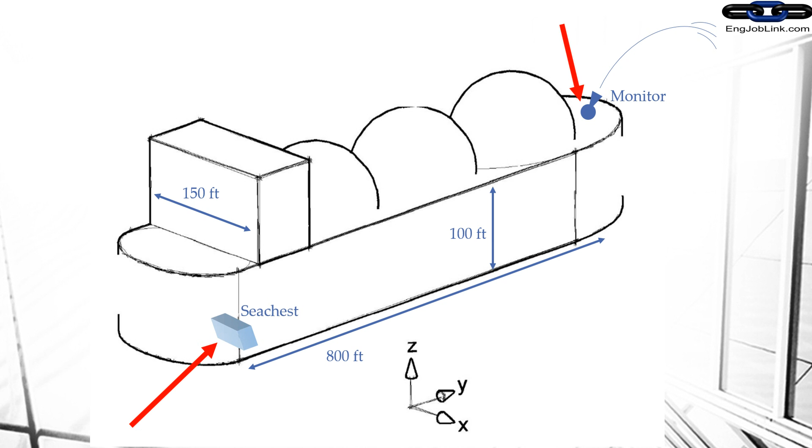Here's an isometric view of our tanker for our system setup. Monitor up front, sea chest in back, 800 feet in between. Alright, let's go to the setup or the basic strategy.

We're going to use carbon steel pipe, schedule 80 wall thickness. Our suction pipe will be assumed 50 feet long with 10 elbows, 2 butterfly valves, pump elevation of 5 feet above the baseline, that's ABL. Water line at 10 feet ABL.

The distribution pipe after the pump to the monitor will be 1,000 feet assumed. 40 standard elbows, 2 butterfly valves, 1 globe valve, 1 check valve, and the monitor elevation is going to be 5 foot above deck, so that places it 105 feet ABL.

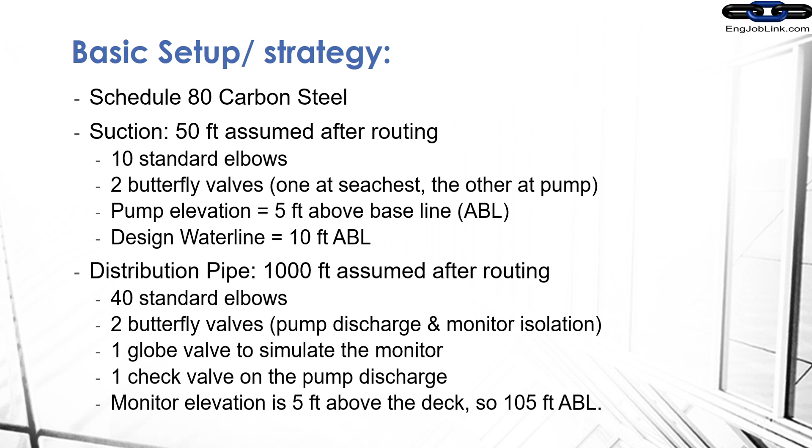Okay, I'm going to set up the system in PIPE-FLO. I already have PIPE-FLO up. One of the first things you do when you open PIPE-FLO to start a new system is you go up and hit System, and you want to set up fluid zone, which is the fluid that you're going to be pumping through a piping system.

Then you will set up specifications, which deal with the type of pipe that you're going to be using, the pipe material and pipe thickness, and then you also set up the units up here. And we are going to use the English units in our example. They're already set up; my PIPE-FLO is English to start with.

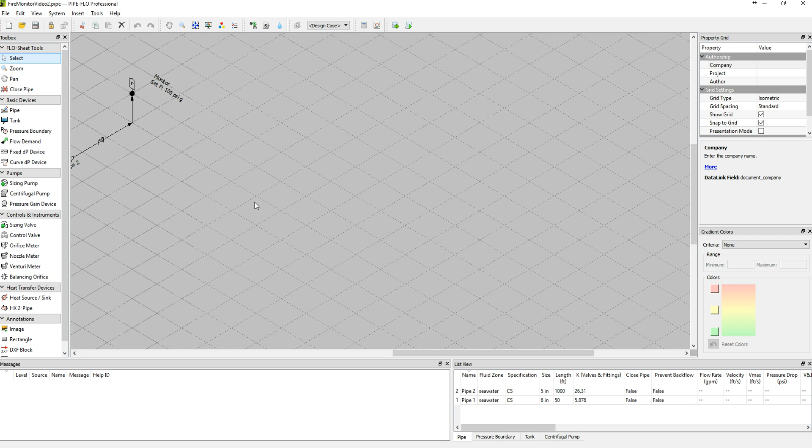So I've already set up these 3 things, and I'm not going to go through that in this video. I already set up the system just like we had spoke about in our setup and strategy. And this is what it looks like: back here is where our sea chest is, and we're going all the way up forward to our monitor.

So our sea chest up and then to a pump in the machinery space, and you're going kind of outboard with the pipe and then up underneath the deck, and then all the way forward to the monitor, and then we're going to penetrate the deck to show where the monitor is going to be located.

All right. I'm going to go through that just to show you how that gets input into PIPE-FLO. So I'm just going to duplicate what I've done here so you see how that's done. First thing, you start with your pipe, or you can start with the sea chest, but I'm going to start with a pipe here.

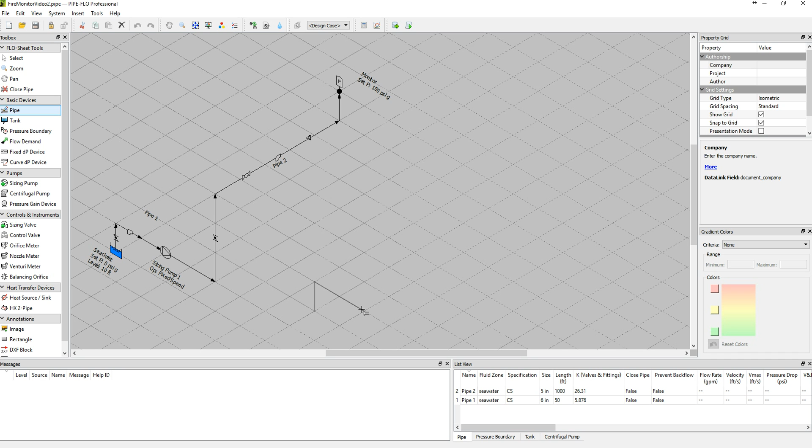I'm going to draw just a little outline of our first piping system there, and I left clicked to start. I left clicked here, and I right clicked here to finish that little pipe. And that's a pipe that's undefined. It automatically numbers it. I'm going to do the same thing.

I'm going to left click here, and here, and here, just to show general routing. I'm going to left click here, then come up, and I'm going to right click there to end it. Alright, so I'll hit the escape button. That gets me out of my pipe routing tool, and I'll define these pipes.

The first one I want to define is this first one I did. It's called pipe 3, and you come up here, and I already named the fluid properties as seawater, and ours was water at 70 degrees Fahrenheit and 0 PSI gauge, so an atmospheric condition.

So seawater, and a specification here up in this property grid as well. I already defined the carbon steel pipe, and I named it CS. So you select that CS, and remember that was up here in the system. We had defined those things. All right, and the size.

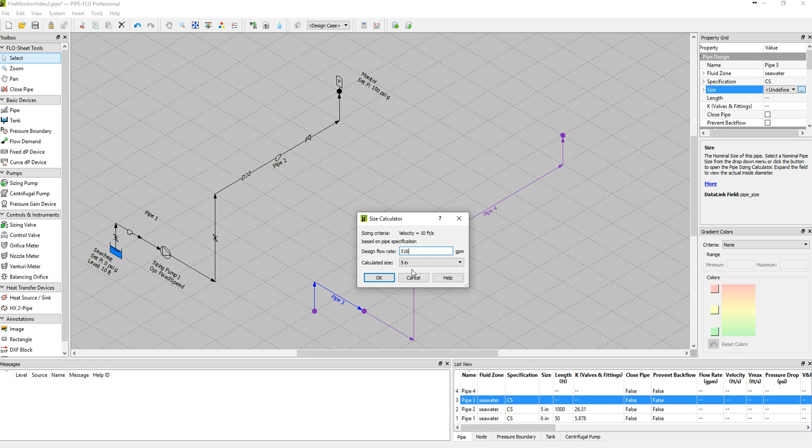You can size it based on a velocity in my setup, and our flow was 516 gallons a minute. So 516 gallons a minute says I need a 5-inch pipe. We're going to come back to that in a minute. I'm going to hit OK for now. We set that as a 5-inch, but we'll revisit that and I'll tell you why. All right, the length on the suction pipe was 50 feet.

All right, and the fittings. First we wanted the elbows in here, so standard elbow. We said 10. You add that. We also wanted 2 butterfly valves, so you click on valves here, hit butterfly, put a count at 2, add that, it puts it in this little window here.

Alright, hit OK. So on our pipe here we have those things, and that's a K value for all those fittings that we put in it. If you click on this first node, we want a 0 elevation ABL, where our sea chest is, hit enter. And on the second node, our pump elevation was at 5 feet ABL, so we're going to say 5 feet, enter.

And the fire monitor, we said before, was at 105 feet. And then the fire monitor discharge pipe, we're going to select seawater, carbon steel, size we said was 5-inch, length 1,000 feet according to our strategy, our initial setup. And we want to go to fittings, standard elbows, and we wanted 40 of them here, big long stretch of pipe.

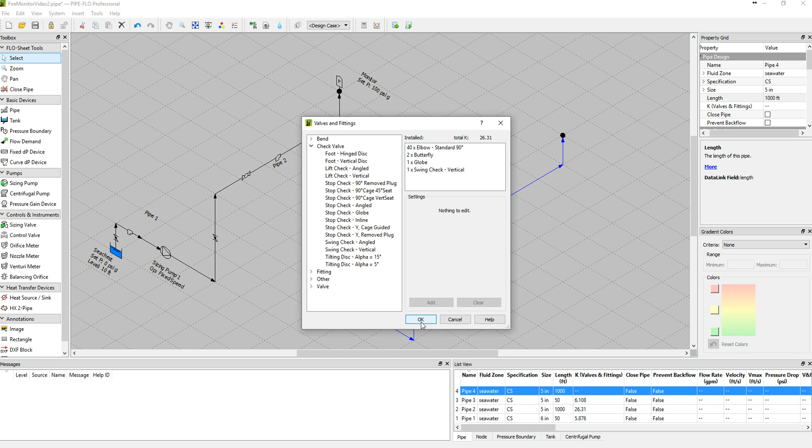And 2 butterfly valves, 1 globe. Now the globe valve simulates the fire monitor valve, so stick a globe valve in there, and then we have a check valve, we'll call it a vertical swing check at the pump discharge. Hit OK. And now you have all of that information in that one pipeline. That's called pipeline 4 here, and you can drag those labels around.

All right. So for our sea chest here, you go and pick a tank over here on basic devices on the far left. Tank, left click, and then left click again. We got a tank. Hit escape to get rid of that. The tank, we're going to call it sea chest. And since I already have one on here named sea chest, I'll call this sea chest 2. Alright, so you put the name on it.

Surface pressure is atmospheric pressure, 0 psig. Liquid level is going to be the water line, design water line, which is 10 feet, 10 feet ABL, above baseline. So the water line is 10 feet above all this. So that's 5 feet above our pump. Our pump's at 5 feet. All right, so you got the water line in here.

Our monitor, we said we wanted at 100 psi here. So how you do that, you pick a pressure boundary, you stick it on there, left click, hit escape to get rid of that selection. And pressure, we want 100 psig. All right.

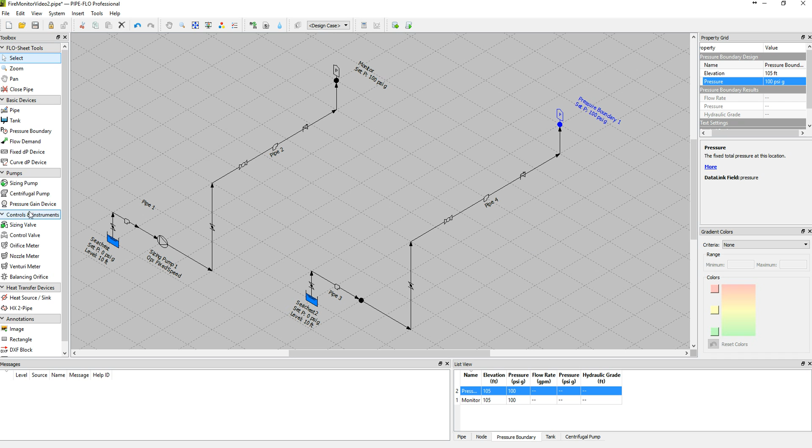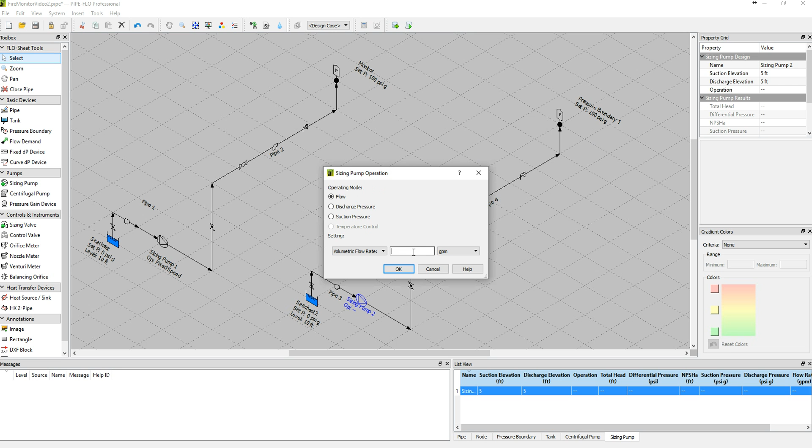Now we have to size a pump. So what you need to do is hit a sizing pump. The type of pump doesn't matter yet. Stick a sizing pump on there, and hit escape to get rid of the selection that's dragging around, and hit operation over here on the property grid, and a window pops up. Tell it what flow you want, 516 gallons a minute. Hit OK and enter.

And once you've got all that in there, all your system design is in here. Up on the top screen in the middle is a calculate button. You hit that calculate button, and it tells you at your 516 gallons a minute the TDH across that pump, total dynamic head, or it says TH here, total head, 425.9 feet. All right, and you got 9 feet per second in this 5-inch pipe, and 9 feet per second in this 5-inch pipe. Now, I don't like 9 feet per second in a suction pipe, and ours is going to be a centrifugal pump, so we could very likely have suction head problems.

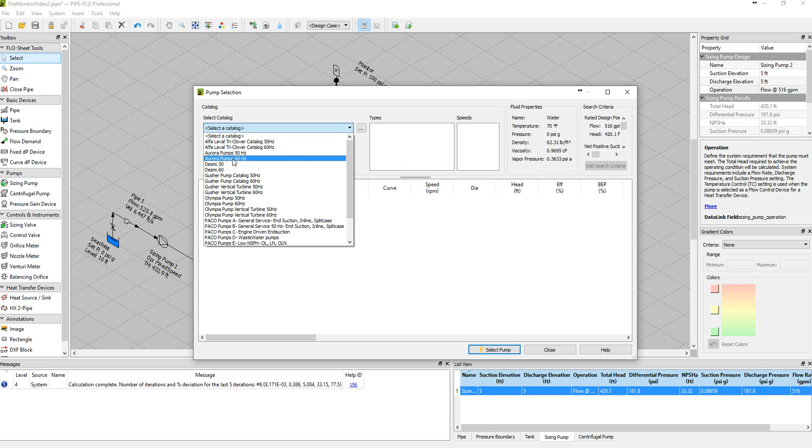So what I wanted to do here was just bump that pipe size up by 1, make it a 6-inch pipe. All right, and that gets us down to 6 feet per second, which I like much better. So we've got a sizing pump, and that's not a real pump yet. So if you click on that pump, and then you right click on it and select catalog pump, I have pumps downloaded in here. These are free from the PIPE-FLO catalog downloads, and I'm going to look at an Aurora 60 Hertz pump. The 410 series gave us a couple of selections.

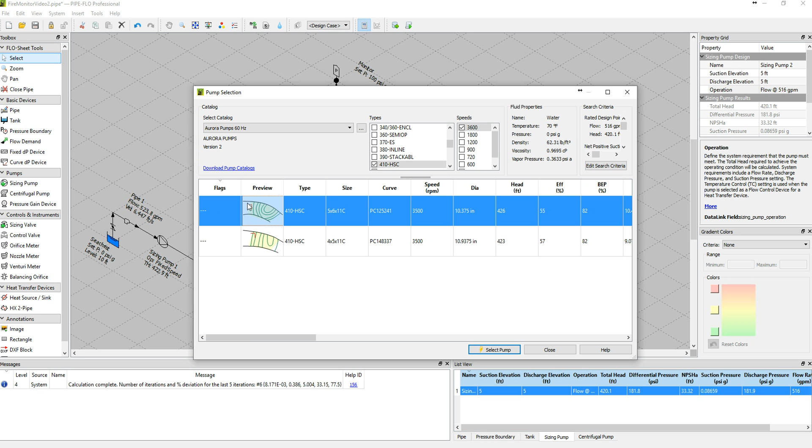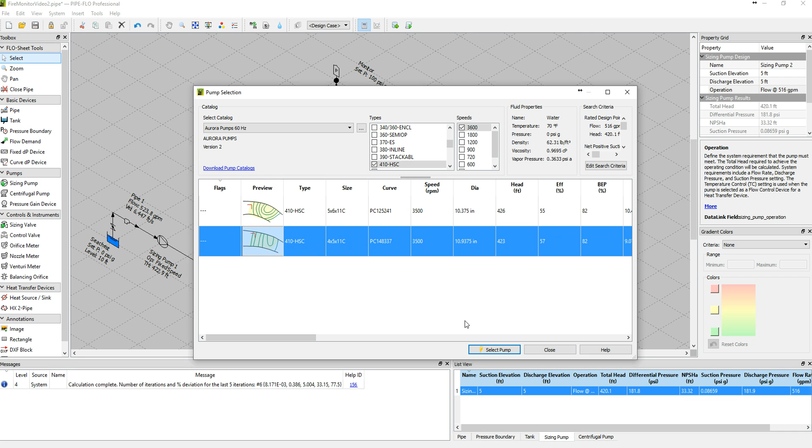The first one here, let's see, I'm looking for the pump power. Okay, 200 horsepower on the first one, 150 horsepower pump motor on the second one. So we'd really like to stick with the 150 if that'll work, just for costs. It looks like the first pump curve has a little more shape to it than the second one. On a fire pump, it's nice to have a flat curve if you can, because the further you go out on pressure drop changes, or on flow changes, you don't have that much of a pressure change. So we're going to select this second pump, and bam, it sticks it in there.

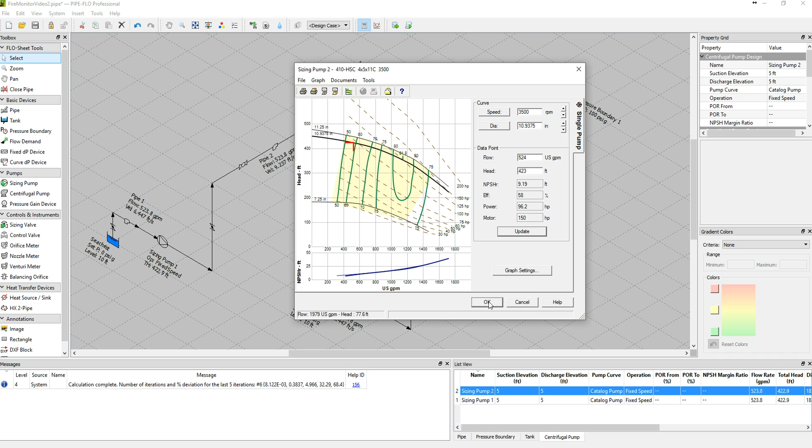And you can actually take a look at that pump curve by right-clicking on the pump and then selecting the graph, and you can see where we are on that pump curve. We're way up high, and we're just around 60% efficiency. We're not nearly over here where we would have a good operating efficiency, but that one will work for this situation. And you can actually go through there and look for other pump selections that might even be a better match, but we're going to stick with that one for now. And hit OK. You got your pump in there.

You got your flow. Ended up at 523 gallons per minute based on all your system pressure drops with your fittings and valves and your monitor. And with all of that in there, with this pump, you've got 100 psi at the monitor itself. So if you have 100 psi at the monitor, then you have our target flow, our target reach. So that's exactly what we wanted to do. And there you have your PIPE-FLO example.

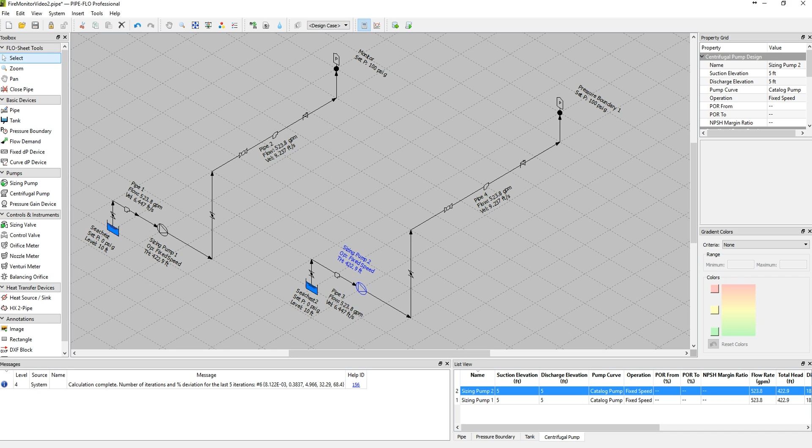That concludes part 2 of our video guide for the fire monitor design. If you missed part 1, please go click on that video and watch it as well for setup.